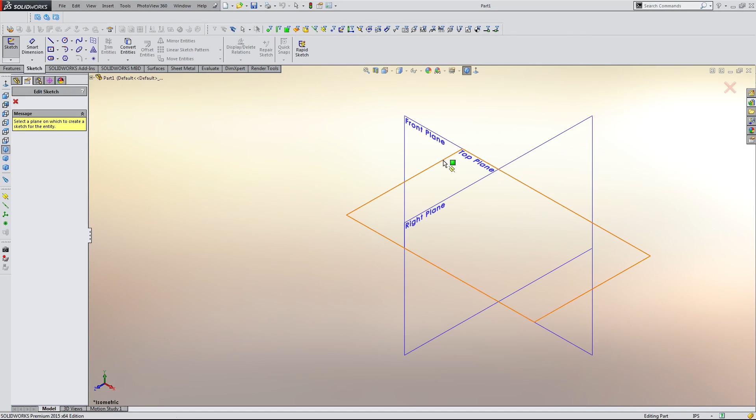In this video I'm going to go over a little bit of the geometry sketches to get a rough idea of what I want my robot to be, or just the general shape. Hopefully I can explain something that'll help you get an idea of how to design robots in sketches.

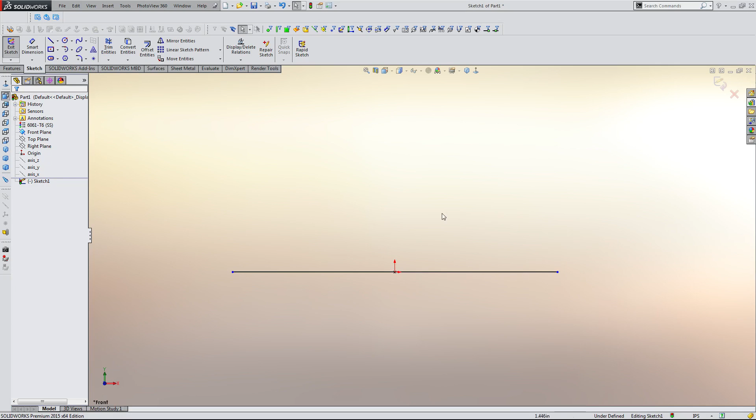What I'm doing here is getting started with a side view of my robot. I always like designing from the side first, and I'm going to put that in the center. This blue rectangle up here is my 2x1 frame. I mostly design using 2x1 pieces of frame, so I usually start with that. You don't have to if you don't want.

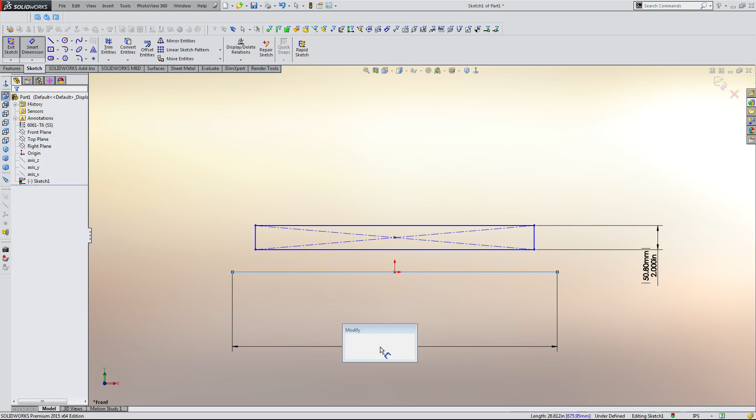This down here is my ground. I'm just going to make the ground 60 inches. I don't know how long I want my robot to be. Really, it could be the length of a ball if I wanted, because that's all I need to do is hold a single ball. But the longer it is, the more stable it is, so we'll see how that works out.

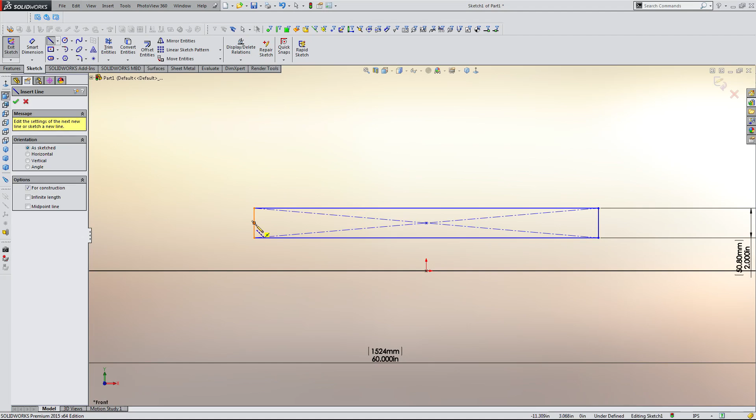It's got some wheels in here. I think it's going to be an 8-wheel drive, so I'll have, let's say, a 3/16 offset. I will put my wheel dimension as 8 inches. I'll make that tangent there.

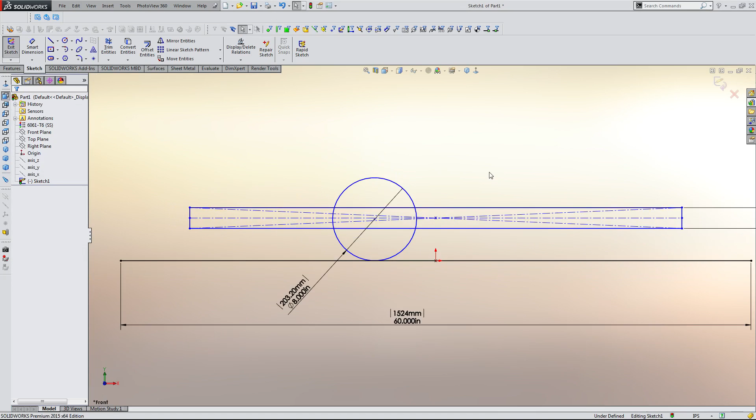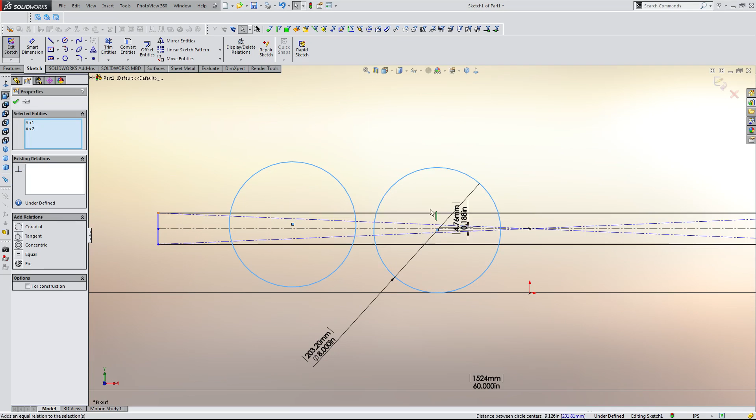I'm going to do a 3/16 offset, so that'll be 3/32 below, but since I'm using the SolidWorks tool like that, I will go above. Make another wheel, same size, and I'll say that it's 3/16 total difference as well.

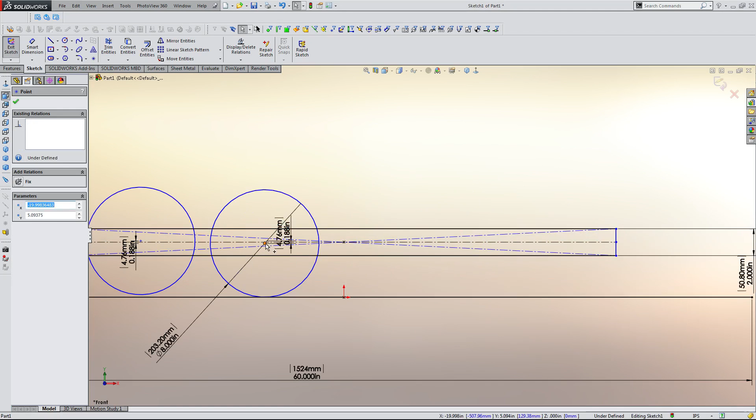As for the distance between them, let me see. This is currently at 40-something inches. I want to minimize that. I also want to bring this closer to center. So the goal here is - oh wow, nope, that's bigger than I need it to be. Okay.

The goal is I want my robot to be long, because the longer it is, in general, the more stable it's going to be, so going over obstacles can be a lot easier. However, with certain obstacles like the moat and the rock wall, having your wheels close together also helps, because as soon as you have a gap in your frame between your wheels, you're more likely to get stuck there.

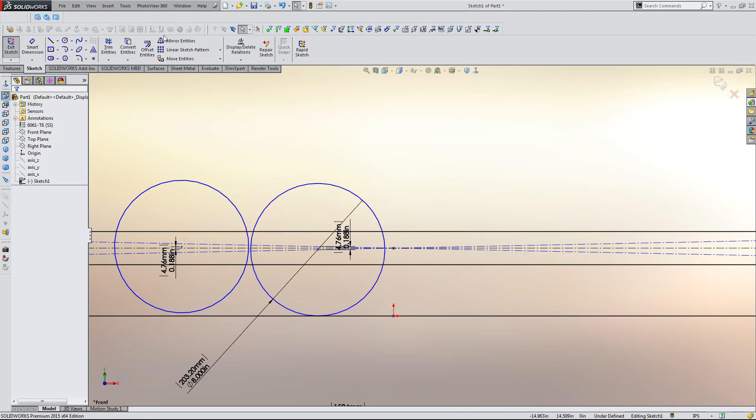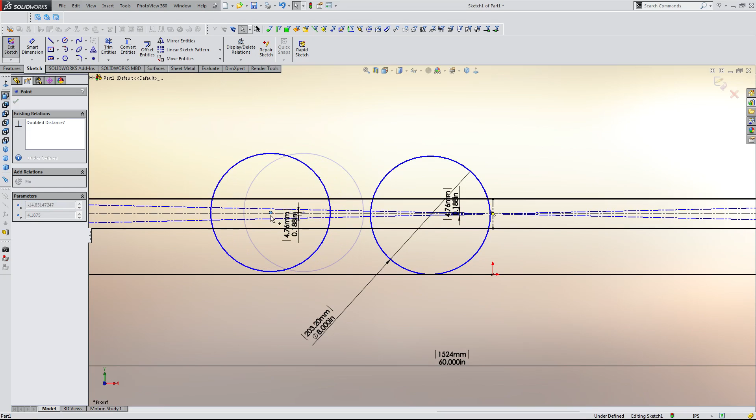So, want to make my robot long, but not too long. Like, that's too long, I need to mention this quick. At the same time, I want it to be - okay, that's what's making it long, shouldn't be though, it's not related in any way. Point being, I want it to be long, but not too long, and I want the wheels to be close together.

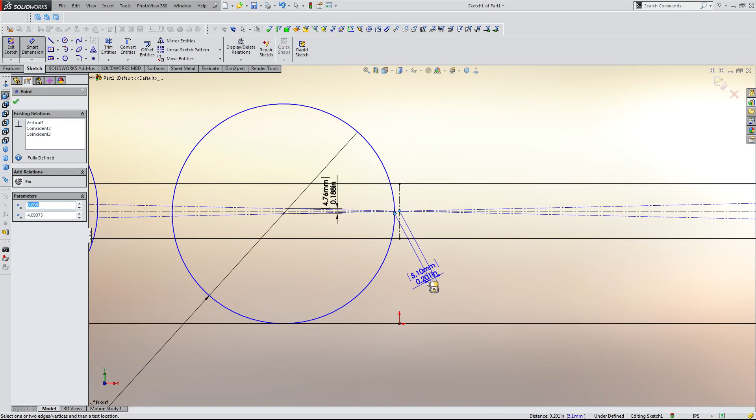So I'm just going to do a little legwork, make some estimates here, and hope it's all goody-goody. I'm trying to get a horizontal distance here. It's not being nice to me. Okay.

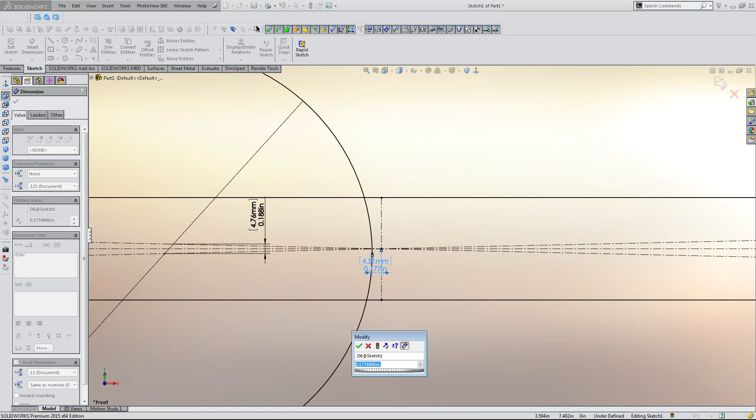So I'll have, just accounting for fluctuations in wheel diameter, a 1/4 inch between my wheels. I'm doing an 8-wheel drive, so this inner wheel is going to have another wheel opposite it. I'll do an 1/8 inch from the center, and that'll be 1/4 inch total. I may change that later on - that's the nice thing about SolidWorks, you can change it.

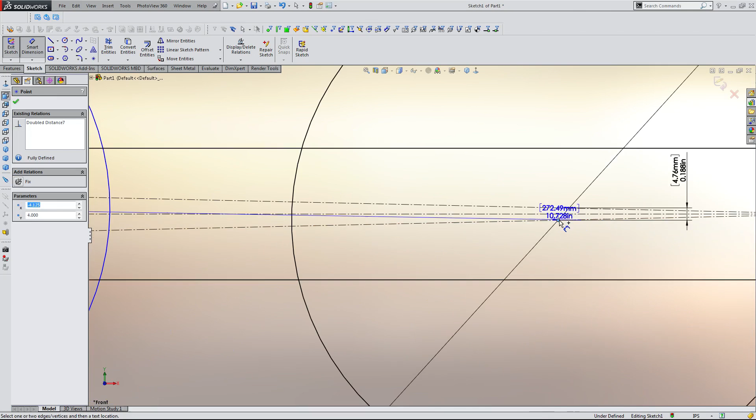And then, say I want the - come on keyboard shortcuts, there you go, just clicking F instead of D - I want the horizontal distance to be about a 1/4 inch distance between what are these 8-inch wheels. So two 4-inch radii and a 1/4 inch, so that will be 8.25.

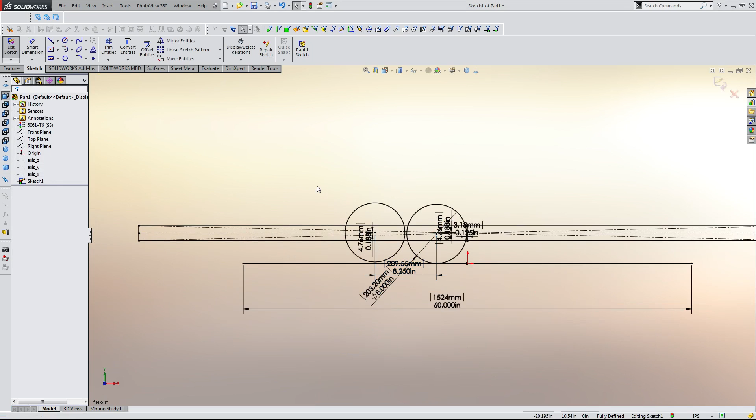Nice. And why is this defined? Okay, so maybe this does have a definition somewhere. What's this horizontal to? It shouldn't be horizontal to anything.

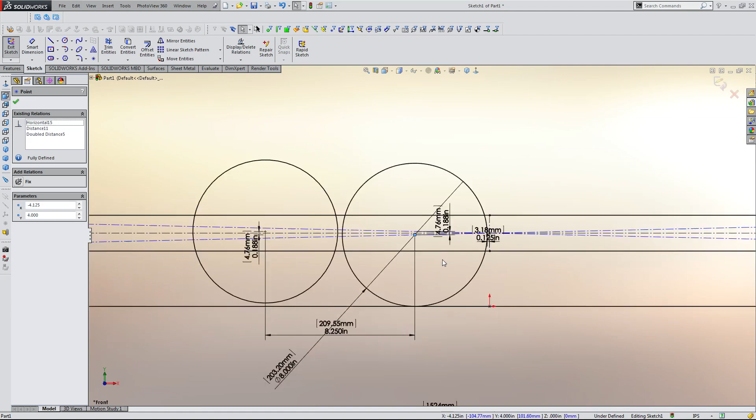It's coincident to that. Okay. Cool, that's why.

Nice, nice. How big is this? 60. Okay, one thing I want to do is make sure my frame is actually pretty well within my wheel. I want my wheel to be what's sticking out the most. That way, when I go over a bump or obstacle, the wheel impacts first and deforms, pushing the robot up. I'm not hitting a hard frame, I'm hitting a pneumatic wheel, which is going to be pretty soft.

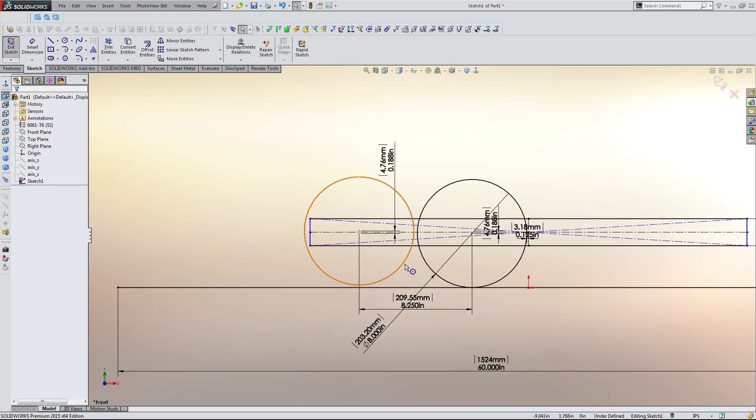So that'll work out good. I want most of my robot, or my center of gravity, to be down low. So that's something to think about as well. I'm going to go with a nice clean number, 30 sounds nice, 30 is a clean number.

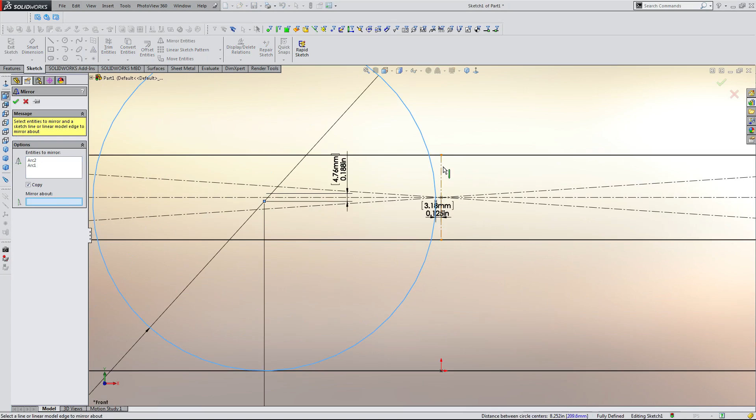So I'm going to mirror these over. I draw that center line. I have a horizontal one and a vertical one as well in the center point rectangle, just so I can mirror things over, or reference things from the center.

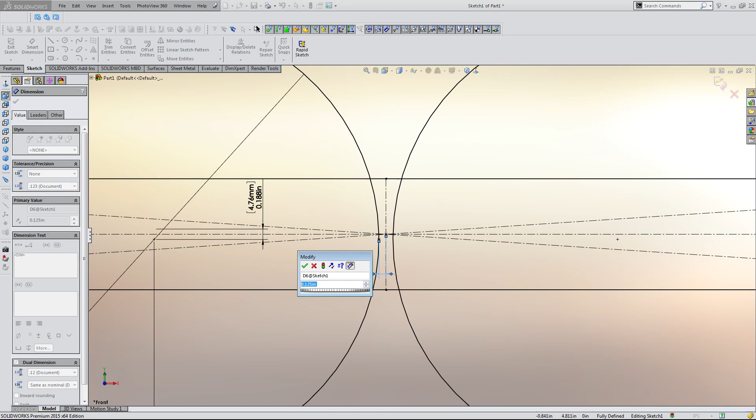Alright, and just looking at this, I'm going to say maybe a 1/4 inch is a little too small. So I will say 3/8.

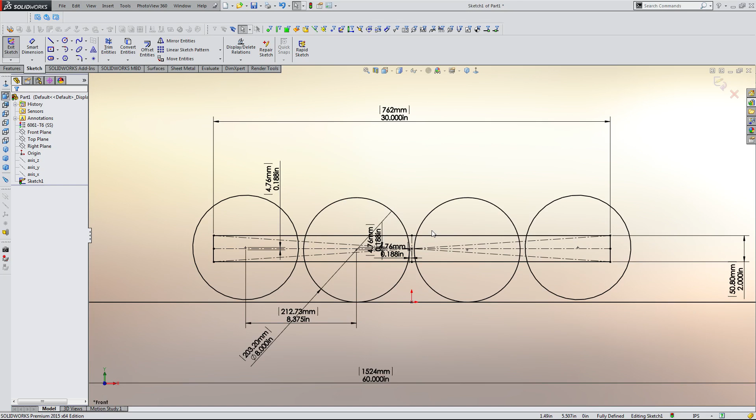And granted, I have no experience in this whatsoever. I've designed quite a few drivetrains, especially for Stronghold. However, I did not use 8-inch pneumatic wheels, and the 6-inch pneumatic wheels we used on 1323 this year, which I helped with the design work for, did not expand as much as the 8-inch ones. So we'll see how that goes. I think that'll be a rough approximation, and this is just a pretend robot, just for practice, so it'll work out.

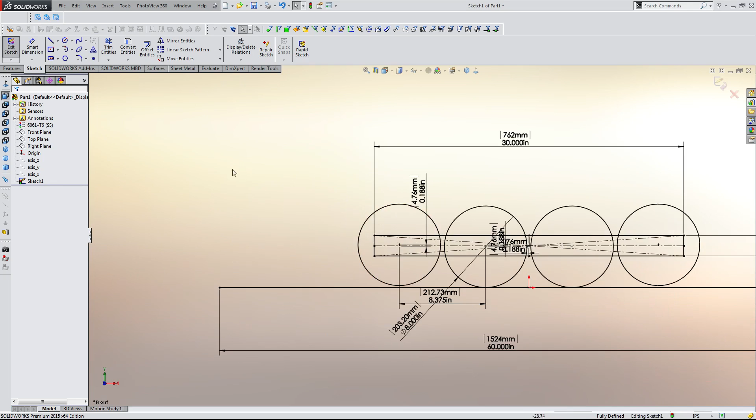So this is going to be my drive base, pretty straightforward. What's nice about this, actually, I'm going to increase the floor size. There, now I can model a ball, which is going to be 8 inches in diameter, nominally 8 inches, and I can sort of see how it'll interact with my robot.

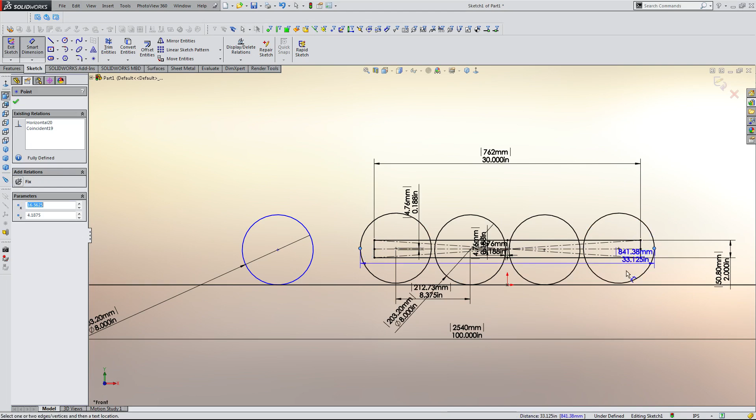Now, of course, I will need my bumpers to come out a little bit further. So I'm going to measure the total distance of my wheels. Okay, 33 1/8. I like doing everything in measurements of halves because I like 1/2 inch hole patterns. So I'm going to say 33 1/2 is going to be my total outside distance, and I'll model that by using a center line, putting it above the origin, vertical to the center of that piece of tube.

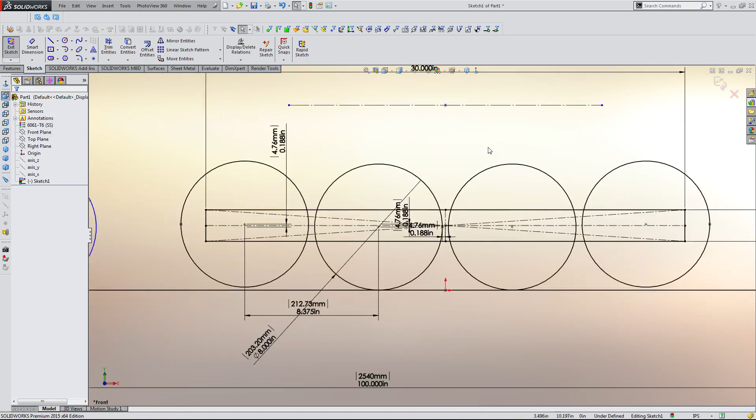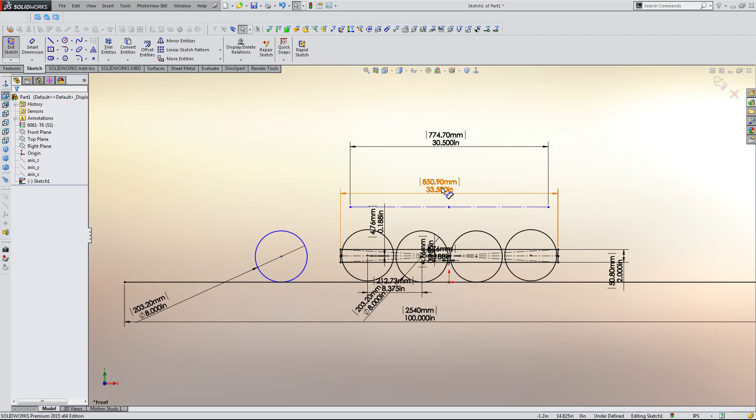Okay, nope, it was not 30. It was very much not 30, because that's the tube size, 33. Okay, cool. Nope, I edited the wrong thing.

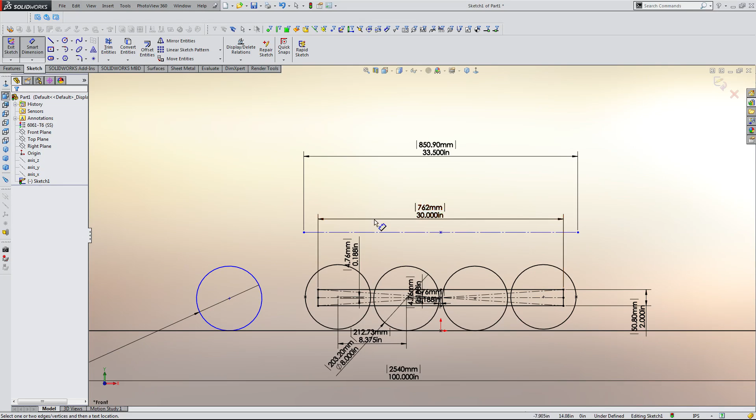Cool, so that's going to be whatever my maximum dimension is, that's going to be where my bumpers connect. And just to help around with some stuff, this isn't like a frame member, that's why it's a construction line. This will be sort of my max dimension in my length. And of course, since this is a two-dimensional drawing from the side, I can't show the width, but I can show the height. So I'm going to use this to show my maximum height, and I'm saying that's going to be 14 inches. I'm just going to leave that up there. Cool.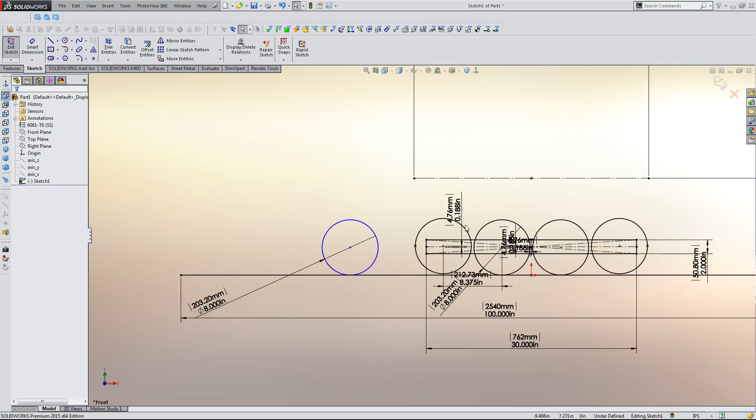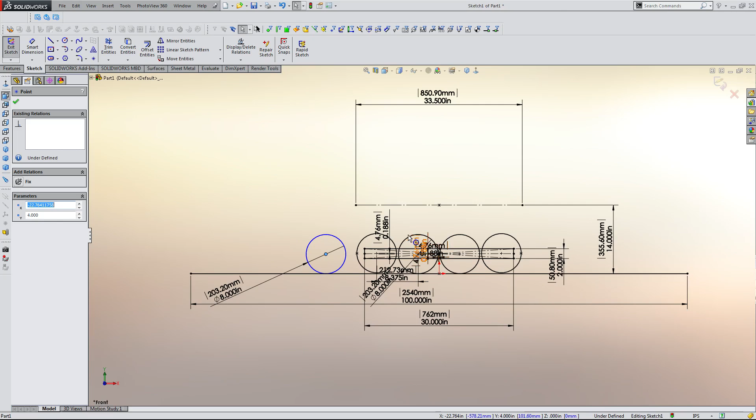Now, the interesting part is using this. I want to create a robot that can ideally pick up this ball from either side, transport it through the entire robot with active control, and spit it out the other side, or whatever side. I'm already having an idea of how that'll do, but I don't want to plan too much yet.

Alright, so we have that. I guess the next thing to do would be an intake. That'll be nice, because I don't really have a shooter.

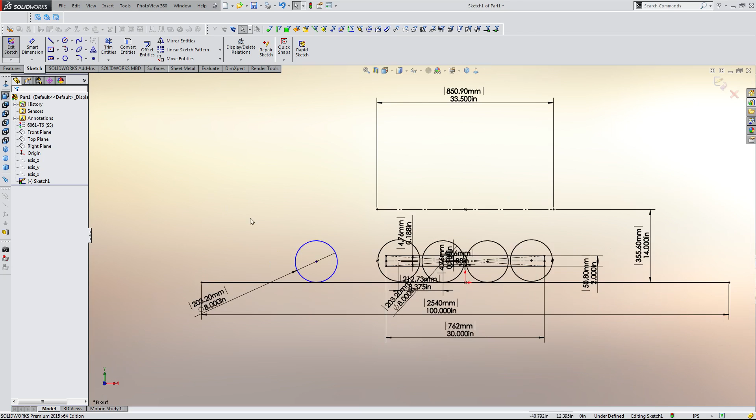So for intake, I was actually really fortunate this year because I got to mentor two extraordinary teams, one being 1323, the other being 971, Spartan Robotics out of Mountain View, California. And I would say arguably 971 had the best intake this entire year. It was the fastest, it was the most effective, it was extremely simple for a 971 subassembly. I mean, no, that was extremely simple for anything 971 ever made. More their robots were like that, then I'd understand them more. I love them though. Okay.

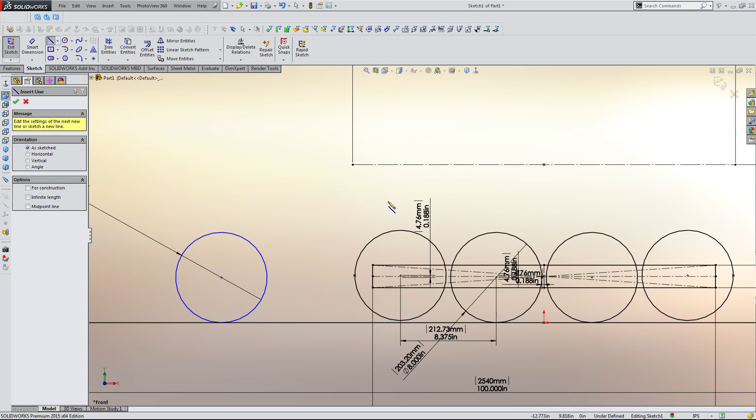So actually, before I get to the intake, I'm gonna... ooh, do I want to do that? Okay, what I'm debating is, I have this idea of actually using that construction line, that exactly 14 inches above, as a framing member, a piece of 1x1 probably. And that'll just show my maximum height already, and I can show how that's connected to the drivetrain. I will think about this. Let's see.

Alright, let's just go with the intake for right now, we're trying to get that fitted. So, like I was saying, 971 had probably the best intake, and it used 4-inch Mecanum and Omni wheels, so that worked really well. I'm just gonna copy that because it's the off season and everything's legal.

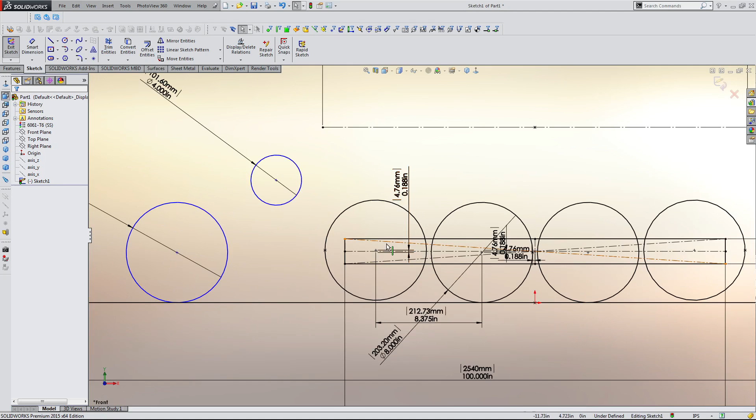Now, this is gonna be at some height. I'm just going to make an estimate as to what compression works best. I really don't know, but I need to figure out how I want to model whatever I use to intake the ball into the robot.

So I'm going to have some kind of 4-inch Mecanum wheel that will go out of the frame at some distance. There is actually an extension distance, a maximum extension, that I don't know off the top of my head, but I don't feel like I'll need it, so that'll be fine.

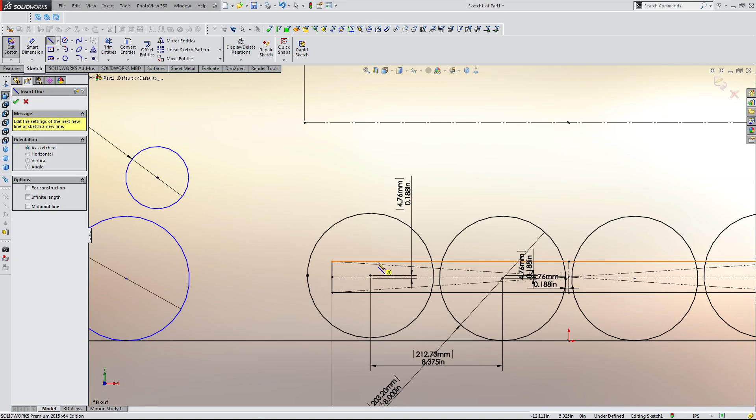I forgot to do this initially, but I'll model the bumpers, and that's super simple, but it's always good to do. The way I like to model bumpers is to start with a rectangle. This is actually the way I learned from Adam Heard in his 973 ramp videos.

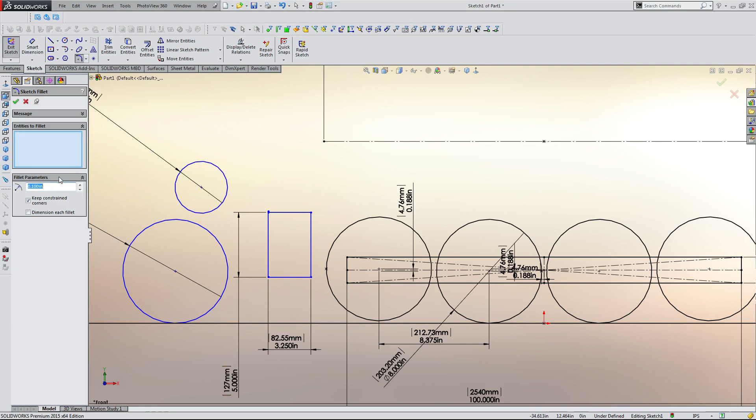I'll give it a thickness of 3 1/4, because that's a 2.5-inch diameter pool noodle plus 3/4 inch plywood. I'll make it 5 inches tall, because that's 2.5-inch pool noodles added up. I'll use a 1 1/4 radius, because that's how it works out to be.

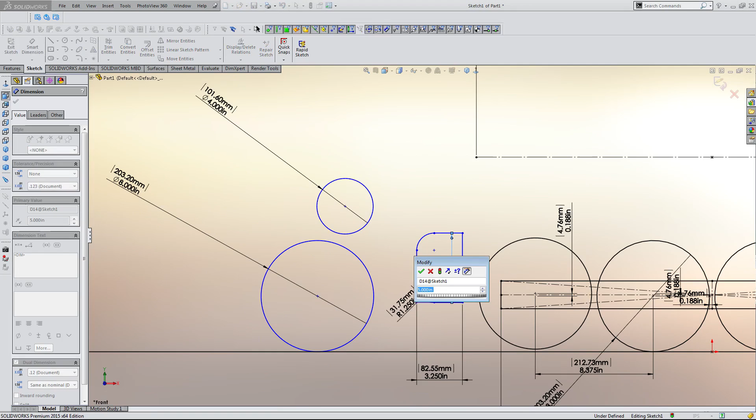Oh, ew. Let me fix that. Yeah, so it's 5. So that's a pretty simple model bumper.

I'm not exactly sure where I want it yet. Maybe I'll have it up high. Ideally it's down low, but I kind of want to experiment. I think you could have your bumpers between 2 and 12 inches this year, so seeing how we could play around with that would be interesting.

I'll put that vertical there, because that's going to be my total outside. And then, for fun, what I call fun, let me put it... how far off the ground do I want this?

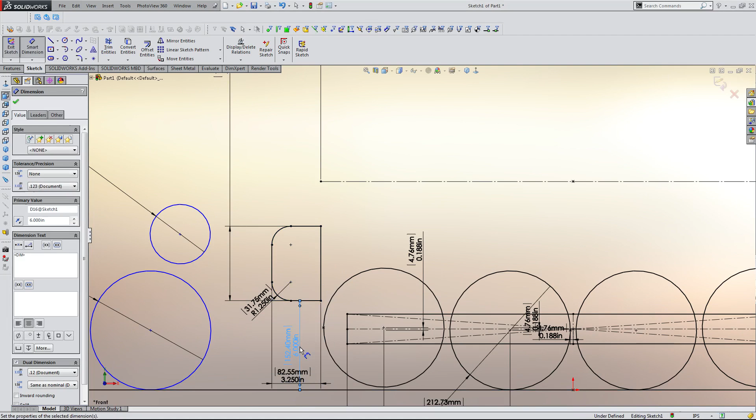6 inches off the ground? I don't know, is that unreasonable? I don't think so, and I can always change this later.

And the bumpers, I'm not doing it over the bumper intake, so that's not going to affect my ball. But it's always nice just to have an idea of where your robot is.

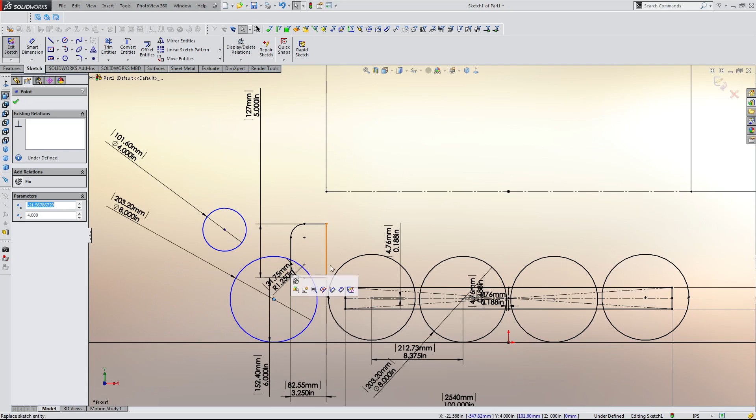So my ideal ball will go into the robot, up into the frame. I don't actually need to go up too far because the frame's not going to go in all the way, or won't yet.

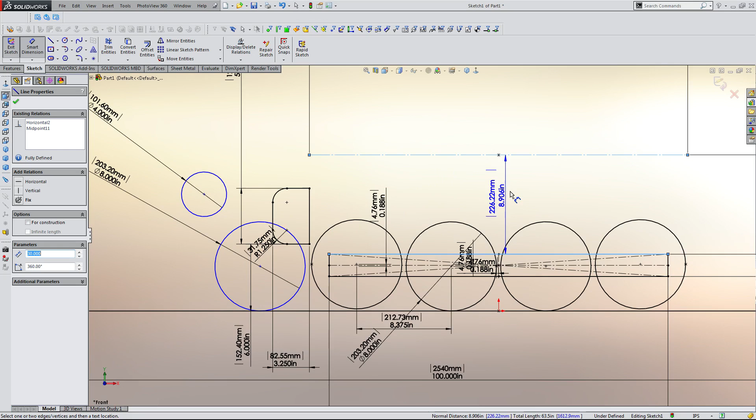A question I have for myself is, at some point, is this ball going to sit on top of this frame, on top of this 2x1? And the reason I'm asking is because I have exactly 8.906 - okay yeah, I have a little under 9 inches, which I can work with, but don't want to push it.

So I'm thinking, how much compression do I want on this? Oh okay, fine, do that. What am I thinking? Oh, I need to have something that can bring the ball from the ground up into the robot.

I always like an active roller. So I'm gonna put...

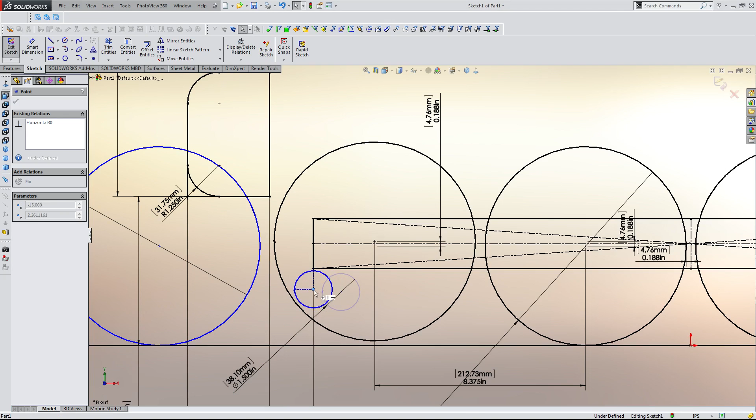Ooh, actually an interesting thing I could try out is I could have this. That's technically within my frame.

So what I'm thinking right now is, typically if I were to have a roller down low that would help roll the ball up into the robot, I'd have it somewhere within the frame, within this piece of 2x1. And the reason I'm not so sure about that now, or I don't think it's completely necessary, is because if it's somewhere outside or further out, it's still within the frame perimeter, and the wheel still somewhat protects it. All that is prime bump location, where if it's going over a defense, it'll hit right there, so that's probably not a good idea.

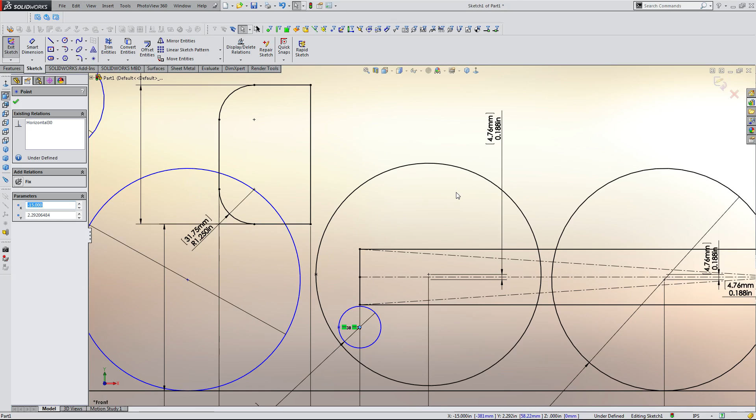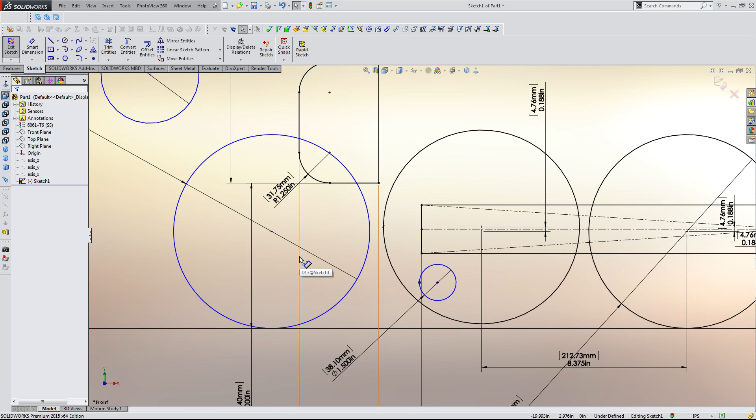Another idea I've had, and I'm unsure of its effectiveness, is side rollers - just something from the side that'll roll a ball in. The advantage of that is you're not necessarily putting something too low, and whatever your ramp is, you could have it be polycarb, something simple, something that could flex. Worst case scenario, the ball touches the polycarb and the side rollers hit somewhere around the top and bring it in.

This is actually more difficult than I thought, though. So let's see, how far are we into recording? Okay, we're close to 20 minutes in, a little 18 and a half minutes.

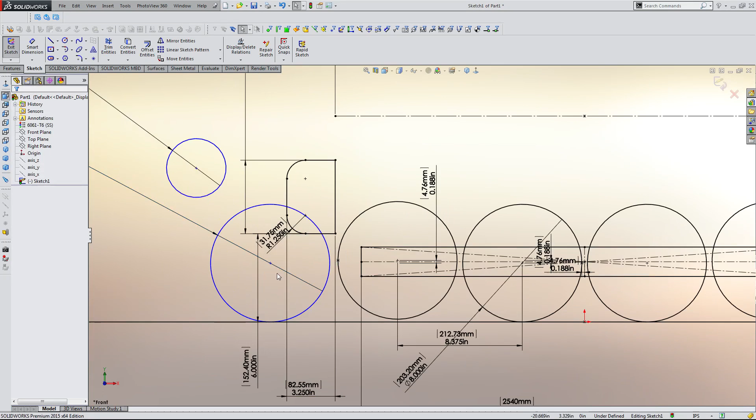I'm going to stop this video right here and do some brainstorming, and hopefully I'll get back in a few minutes. But just a summary of what we've accomplished during this video: we've modeled out our frame, a side profile of our frame and where our wheels are going to be. We've modeled out our maximum dimension, our height. We've modeled out a bumper, a makeshift mechanism wheel roller, and the ball. And from there, we're going to play around with different geometry and work around with ideas on how to get the ball into the robot.